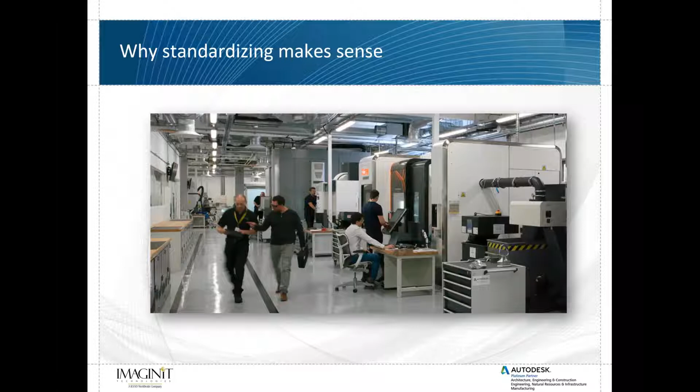So traditionally, manufacturing thrives when we can share data and when we can share workloads a lot easier, and we can automate things that should be automated, and really simplify management of complex processes. And everybody's looking for ways to standardize on all practical objectives within the manufacturing environment. When you do standardize, it does things like address the skills gap. You've got best practices that can be captured, and you're not relying so much on tribal knowledge.

Efficiency of process is basically replacing standalone stuff that's out there and prevalent all over the manufacturing world, and integrating systems to eliminate any redundancy. Yeah, lots of clients we talk to are using different processes for the exact same end game, right? So why not get this all set up to add toward the simplification of everything, streamlining your training, your support, your onboarding, your management, the whole works. That's what this is all about.

And of course, why Autodesk? Well, let's take a look. So for 35 years, Autodesk's mission has been to address what they refer to as the future of making things, right? They've done a lot of research and development into how manufacturing is going to be. It's not just the AutoCAD company anymore. Huge investments have been made in world-class, best-in-class technology that includes things like Moldflow for predictive analysis, Algor. Well, the product we're going to start talking about today that's integrated into Inventor and Fusion used to be called HSM. All these things are huge investments in Autodesk's initiative to become a go-to resource for end-to-end manufacturing technology.

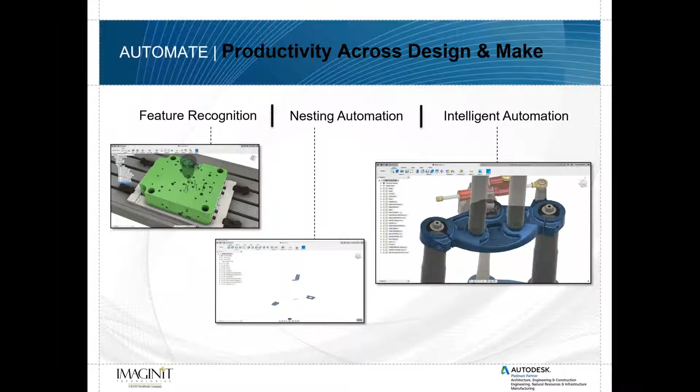All of this involves a technology that can be enhanced even further. So if you want to take this to the next step, you're going to see some stuff that Nathan is going to do for us this morning. It's pretty impressive. But if you want to take it a step further, working toward that standardization of process, and start talking about things like feature recognition, nesting automation, intelligent automation that takes workflows that are repetitive and captures that design.

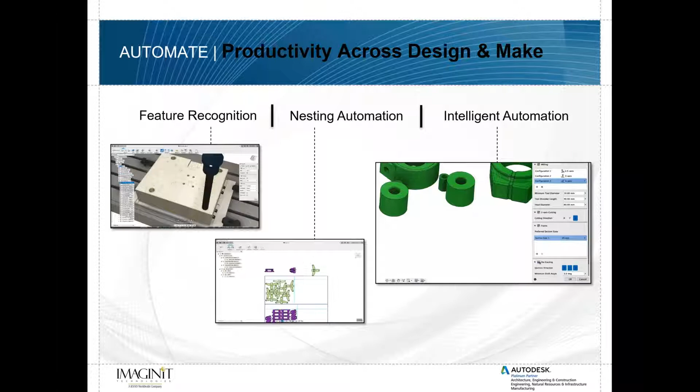For example, we can have our technology look at a hole, understand the diameter, the depth, and the material, and pick out the correct toolpath, workflow, process, whatever you needed to do to address that feature, and not have to have an expert on hand to make that decision up front, right? So it's all kind of captured, various ways of doing that. So we're happy and eager to talk to you about this process and workflow.

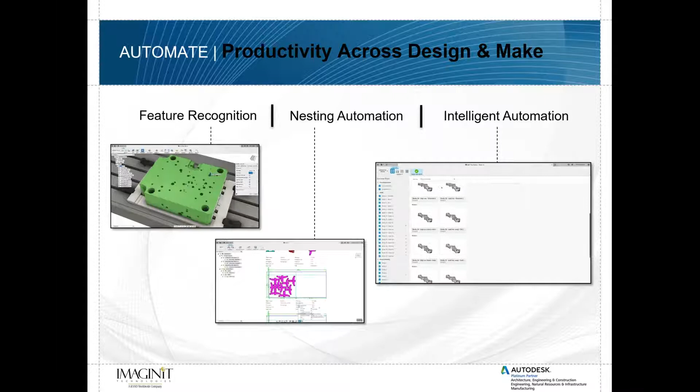I don't want to spend a whole lot of time on all of this, because I know you guys came here for the picks and clicks session of the demo that Nathan is going to present. And just as a quick intro, I know this is called milling. We're going to talk about milling inside of Inventor, but we're going to use Inventor and Fusion for a couple of things. We're going to do some multi-axis machining on the part that you see on the left, and then we're going to talk briefly about some turning operations on the part that you see on the right.

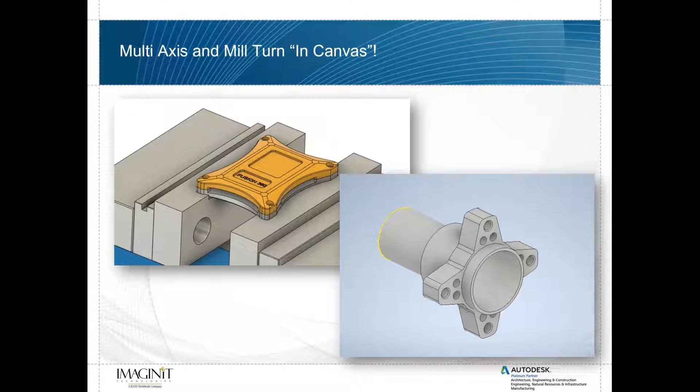So these are two fairly typical concepts, fairly typical geometry that you'll see used inside of the CAM environments, inside of our technology. So with all of that, I am ready to hand things over to Nathan to talk about using the CAM environment within Inventor and Fusion.

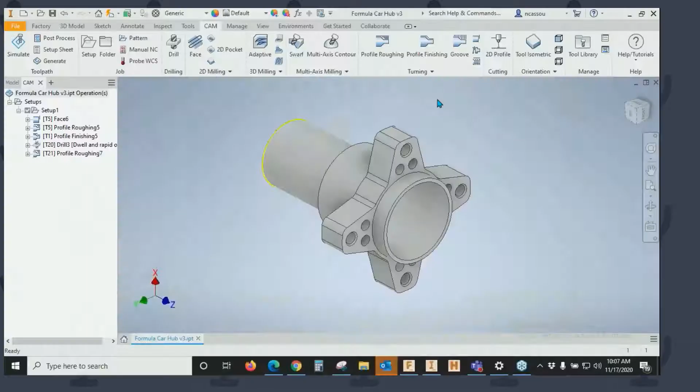Are you ready to share your screen, sir? I'm ready. All right, I think you can grab it. I don't think I have to. Let's see here. Maybe I need to change presenter here. Yeah, go ahead and change the presenter. There you go. Can you guys see me? I don't see you yet, Nathan. Have you hit show screen? There we go. How's that? Oh, there we go. Seeing you now. All right. Good deal. And kind of move this out of the way if I can.

All right. Well, thank you for joining me, everybody. I'm going to take you through the HSM CAM workspace as well as Fusion. I'm going to start out in Inventor HSM, and then we'll move on into Fusion. I'll show you some multi-axis CAM strategies in there in a little bit. And I really want to show you the similarities between the two, but also how they're different.

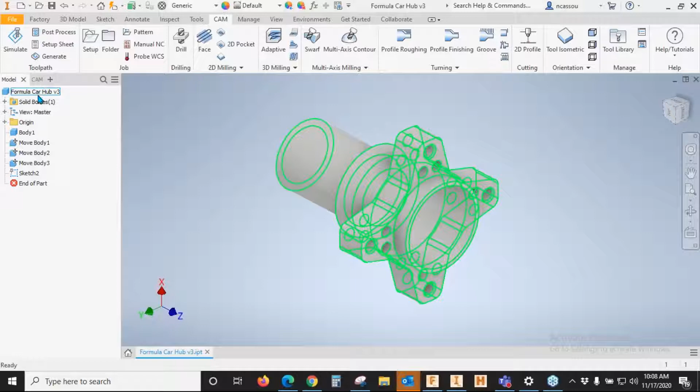So starting out in Inventor HSM, Inventor is more of your traditional integrated CAD/CAM software. So in the modeling section, we can see we've got our basic workflow and our feature tree down here, where we can see our parts being designed right here. And the big takeaway from Inventor HSM and Fusion is that it really works in conjunction with the CAM environment. So any changes we make to our design and our geometry will automatically update our toolpaths in our CAM.

So starting right here at the top, well, actually, I'm going to go right here into our 3D modeling. In Inventor, we have our full 3D modeling suite. So any design changes we want to make, any kind of sketches, annotation, inspection, it's all right here for us. And we can use all of these features in conjunction with our CAM environment. So that's important to know when we're doing our setups. So we're going to go ahead and jump into our CAM environment, and I'll give you a really quick run-through of what we have up top here.

In our toolpaths, we can choose to simulate, post-process our code for our machine, and generate setup sheets for operators in a really timely fashion. It's really important when we're making toolpaths that we simulate them so we can really see what's going on.

And then moving from left to right here, we can organize our toolpaths and our jobs with folders, and then create new setups as necessary, depending on what kind of machine we're working on. And then moving along, we have our full drilling, 2D milling, 3D milling, multi-axis, and turning suite for doing all kinds of different parts on different machines.

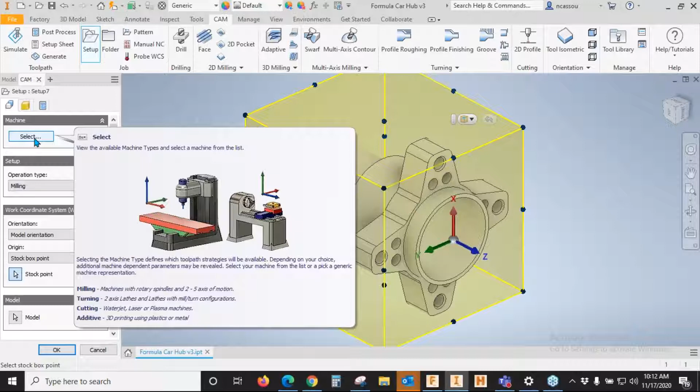So when you're first learning the program, you'll have these dialog boxes that pop up when you click on an option or an operation, and if you're unsure what that option is going to do, it gives you a brief explanation. I'm pretty happy with my machine. I'm going to let the program default.

Moving on down, I know this is a mill turn operation, so I'm going to go ahead and toggle that on. A lot of live tooling lathes will have dual spindles if you need to work on opposite ends of the part, which in this case is correct.

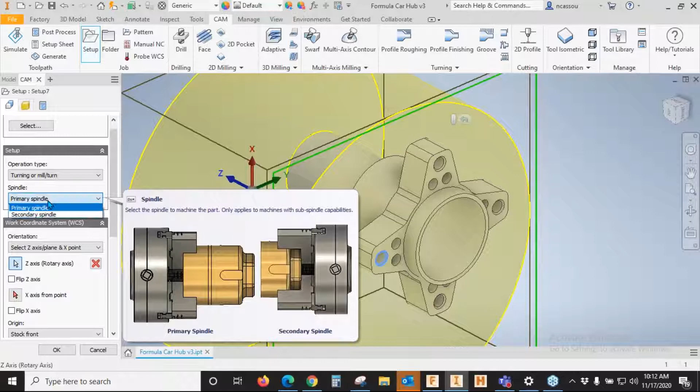So in this case, I'm going to hit the secondary spindle because I want to concentrate on this side of the part, as I've already done a setup for this side. We are going to do a little bit of turning over here, but this is a very simple turning setup on this side, so we'll focus on the milling and turning on this side so we can get a better description of what mill turning is.

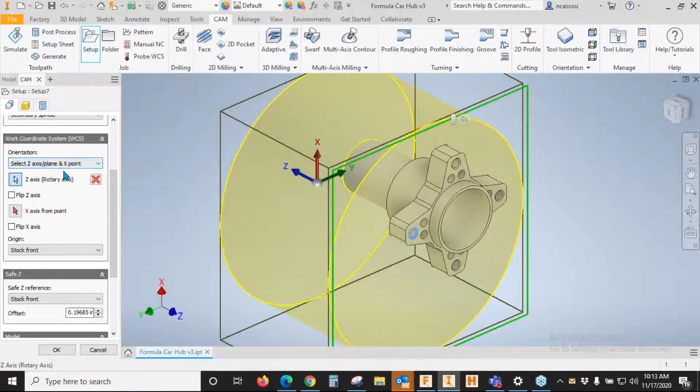And then working on down, we have our ability to set our work coordinate system point, also known as our Z0. And it gives us quite a few options for doing that. We can either choose it based on the model orientation, or we can just go ahead and select certain geometry of the part. And the program's smart enough to know that the Z axis is going to run straight through our part. So we'll go ahead and click on that.

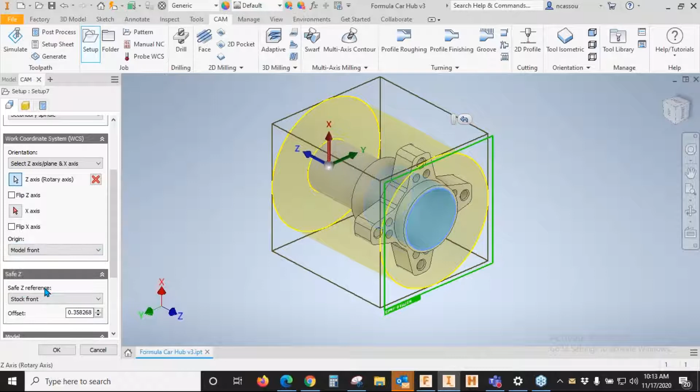I want to describe that as my model front, but I want to flip that Z axis so it knows that's the front of the part that I want to work on. And then moving on down, it's important to know that when we're doing a mill turn setup, we check that box there that says spun profile.

This ensures that anytime we're doing a turned feature, it's not going to try to turn any of these contours that we want to save for milling, because that's just asking for trouble. So it's going to ensure that when we ask it to do a turn profile, it's going to stick to that only. And then moving on into our stock, Fusion and HSM have a really handy way of being able to describe your stock.

With this drop-down menu, we can either choose from a solid, or we can choose if we want to go ahead and model our stock and then move it into the CAM environment. We can do that.

I usually choose with these default options to pick a relative size cylinder. I always like to default to a relative size because that gives you the option of adding a little more stock. In this case, I want to add about 40 thousandths to the front and the back, so we have a little extra stock to make a nice clean surface.

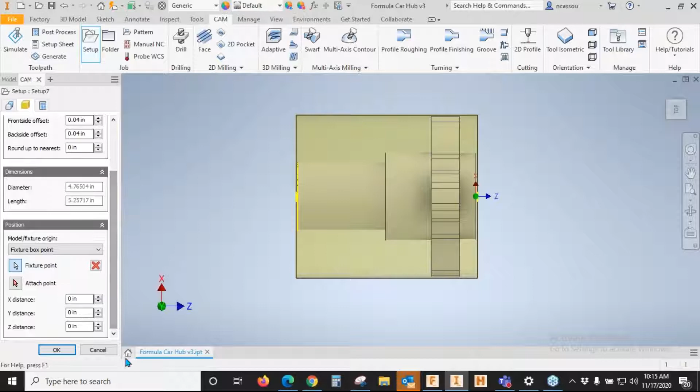I'm happy with my post processor, my post name. We'll just leave that as default. I'm going to go ahead and click OK.

We've already got our first setup. So now once you set up the stock and the work coordinate system, we can go ahead and start choosing operations that we'd like to do. The first op that's pretty common in all machining is a facing operation.

That's just when we get in raw material, the outside material is dirty, it's gouged, it's uneven. So we want to face that off to a nice clean surface where we can start measuring features from. In this case, I'm going to choose my facing feature.

Every operation kind of goes from left to right, and it allows you to first pick your tool, your geometry, your boundaries, and your passes.

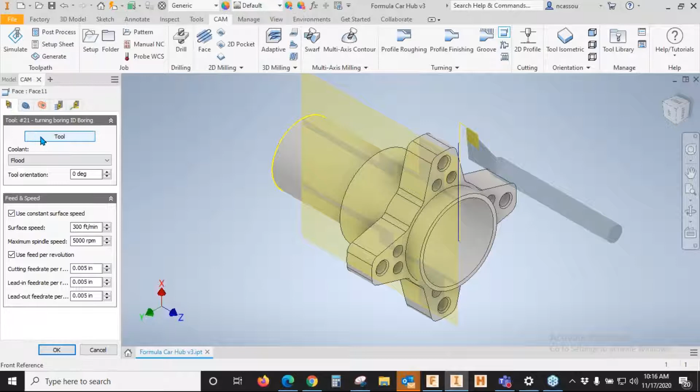Starting with our tool, once I click on tool, the tool manager will pop up, and both in Fusion and HSM it's very flexible on how you can add tools, make tools, import, export. So if you can't find a tool within the default part of HSM, you can choose to build your own tool and even create your own libraries as you go along.

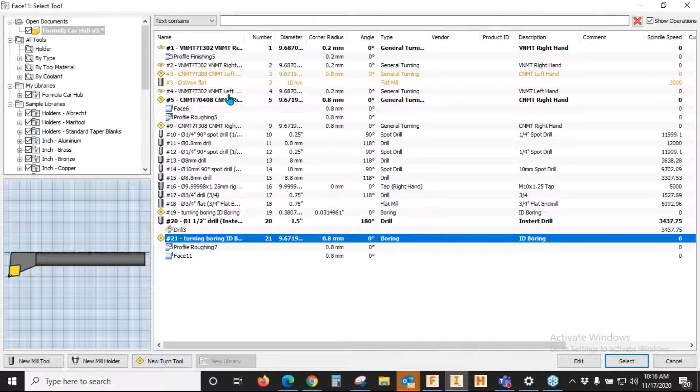In this case, I've already created my own tool library for this part. So I'm going to go ahead and click on my facing tool, this 0.8 millimeter turning tool. I'm going to select that.

Moving right along to our boundaries, this really describes how we can set up where we want this tool to start and stop. Automatically we know that we want to face off the front of that part. The program is smart enough to know that it's a facing op. We want to bring all that material down just to that Z0. But if we want to take off more, we can always add an offset there as well.

Moving right along to our clearances, this is a really handy way to control the behavior of how the tool enters and exits, actually, as it's transitioning around the part when you're cutting features. This is a great way to avoid crashing. Again, this is easily interactive, so we can grab this and grab our part and move it in and out and kind of see visually where we want those clearances to be, as opposed to just entering numbers in all the time.

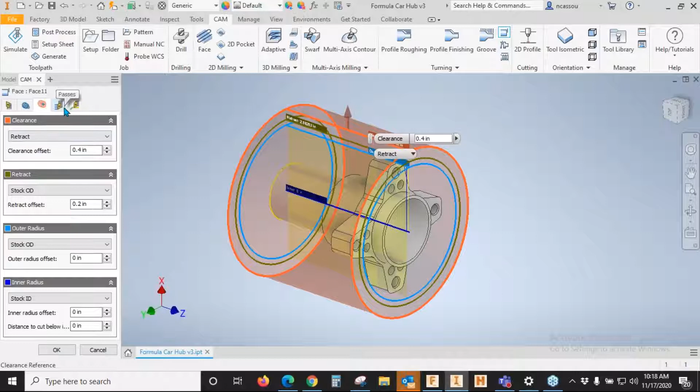I'm going to leave those as stock value, because another great thing about Fusion and HSM is a lot of the default values, when you're first starting to create a tool path, are pretty close to spot on, and you can use those values and then go back and tweak it as you wish.

So for passes, you do have the option to have multiple passes on each feature. In this case, I know I've got that 40 thousandths that I want to take off in the front. I'm going to be generous, I'm going to say 20 thousandths, and it'll automatically calculate the number of step overs based on the width of the step over that I want.

And then in linking passes, you can control the in and out of the tool on each feature. So I'm pretty happy with that. And we've already got our facing feature, so we faced off that front face of the stock.

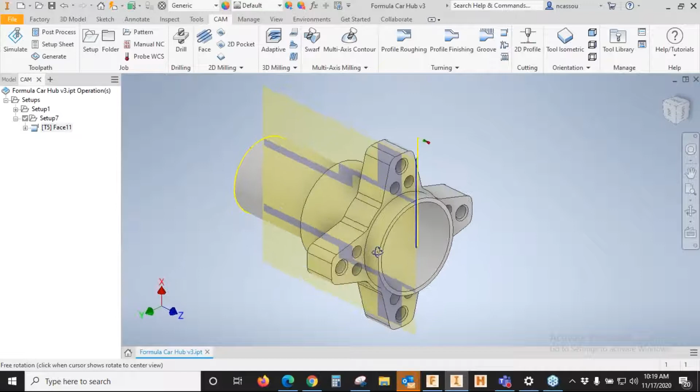Now we can go ahead and start working on that little turned part there, that little turned boss. So we're going to go ahead and click a roughing profile strategy. Again, going to go up here. I'm going to use that same tool that we used for facing.

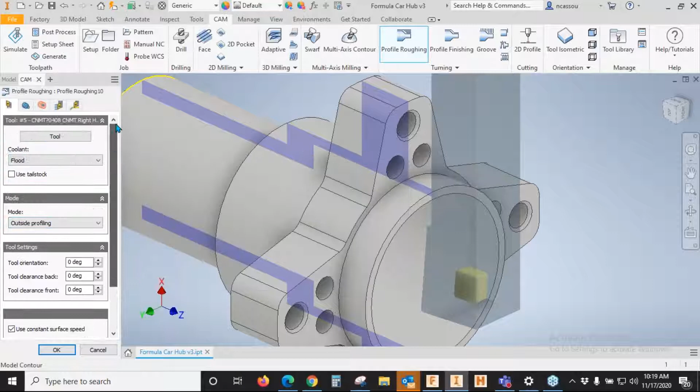And what I want to do now is tell it that it's an outside profile, not an inside. So it gives us that option. We're going to use that same profile whether we're doing an inside strategy or outside, but it gives us that option. Moving right along to our geometry.

So when we're choosing our boundaries for both milling and turning, it automatically knows what you want to cut, but you want to kind of give it a boundary. So I know I don't want to cut all the way back here. I want to set my front boundary at the front of my part, but I want to set my back boundary to exactly where I want to stop that cut.

So in this case, I can set my back boundary to that surface. And then when I look at my part on the side, you can see that we're just going to turn that where that highlighted space is. We're just going to turn that boss so we can make room, and I can get in here with that end mill and start milling that contour.

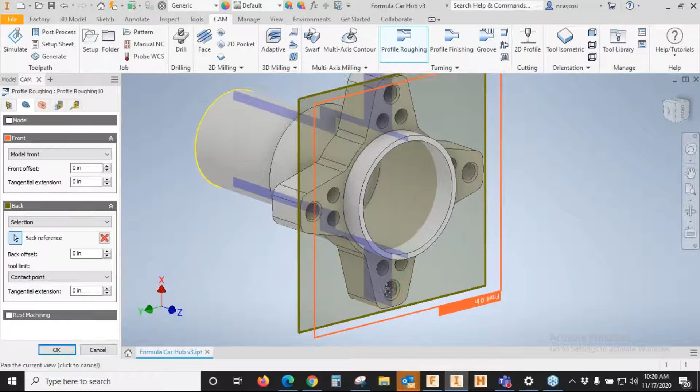So moving right along to our clearances. Again, the stock clearances are usually pretty good. And again, it's all based on the geometry of the part, the tool you pick, and your feeds and speeds. So I'm pretty happy with those.

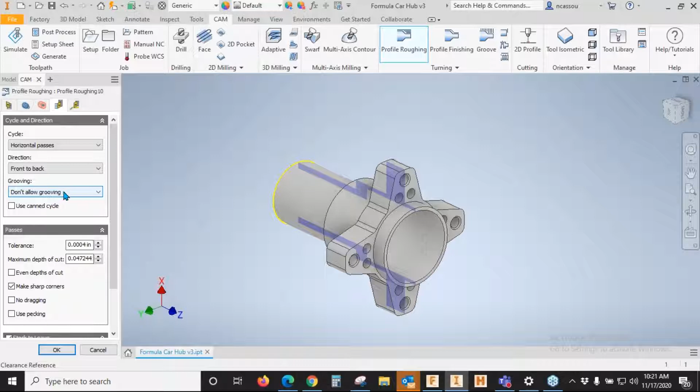Going right along into our passes, I know I want to go from front to back. This being the front, again, being the front of the part. So I know I want to go from front to back. I usually like to toggle off this axial, or excuse me, this grooving here, this axial grooving and radial grooving.

This just tells the program not to do any kind of weird features that it might encounter. Again, this is a pretty simple little boss. We're just going to turn on the outside, but I'd like to toggle that off just so it's not going to try to do any of this other geometry.

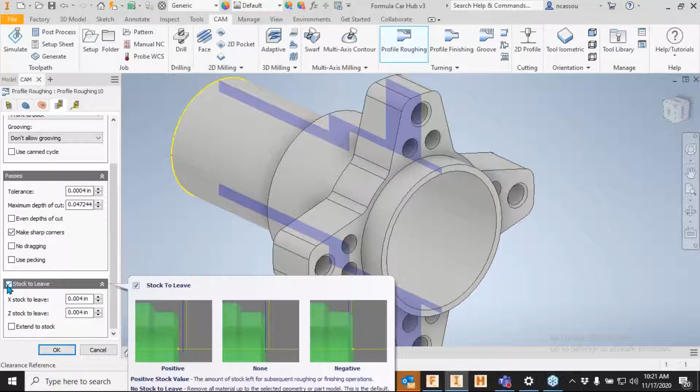And I want to make sure that we can either come down here and we can choose to leave some stock if we want to come back through the finishing tool. I'm going to go ahead and check that off just so we can get a nice visual of what this is going to do. And I'm pretty happy with the lead in and lead out.

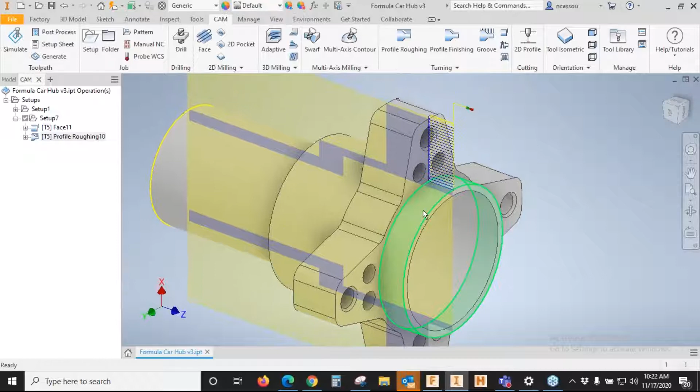And there, right away, we already have our first little turning strategy. So let's go ahead and simulate that and see what it looks like.

So when we simulate, we can either choose to simulate the whole part, or we can choose to simulate different features of the part. And what's really handy about Fusion and HSM is instead of just playing the whole simulation, I can just click through to save time, and I can also see what's going on with the part. So right here, it looks like I have a little bit of a crash, but it's really handy when you're analyzing just the lead in and lead out and your clearances.

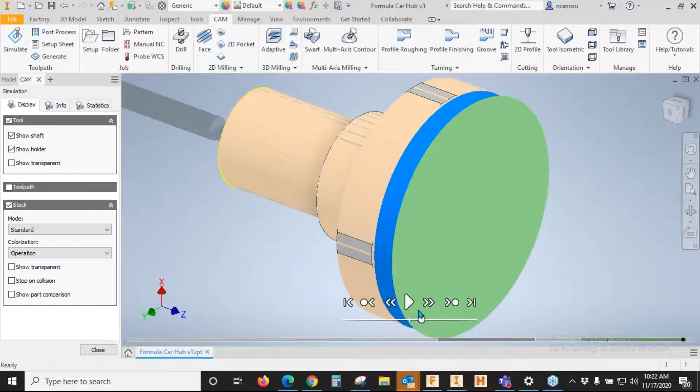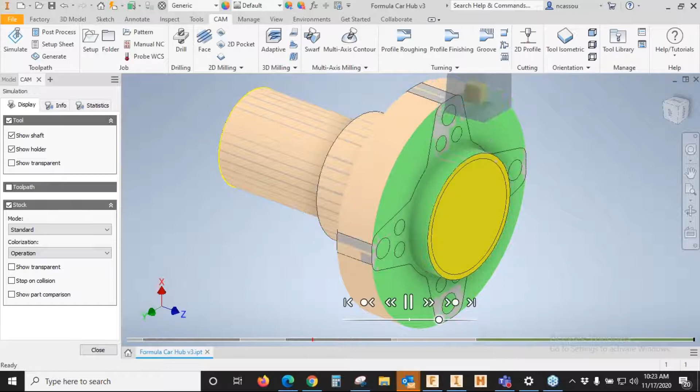So I'm going to go ahead and fast forward through here, slow this down, and then we're going to go ahead and face off that part, that other end. And then automatically it should start coming in here, and then it's going to turn that down all the way down to that bottom stock, excuse me, that finished profile. And we're looking good.

So now once we've turned that, we can go ahead and start working on this outer contour for our milling strategy. Now the cool thing about HSM and Fusion is, again, I can use both these turning profiles, these turning features, and these milling features in the same environment.

And when we want to cut out a rough profile or any kind of a contour or any geometry, both Fusion and HSM have this adaptive clearing strategy, which is a really efficient way to engage the tool to its full potential without really adding a lot of excess tool wear. So in this case, the adaptive clearing strategy engages the tool at about 40% load.

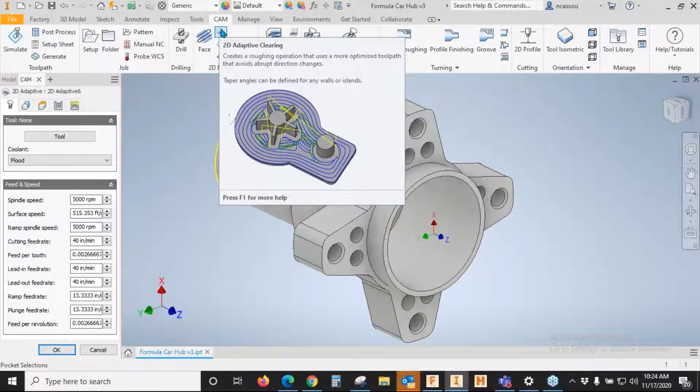And again, that really ensures that the tool is getting used to its full potential, and that it's also not going to burn out. It's going to have a lot of life left in it.

So same thing with turning. We get to pick our tool, and in this case I want to just grab my 3/4 inch flat end mill. One thing to also know, in our tool library, when we click on a tool we can choose to edit that tool. We can edit the holder, the flute length, and any kind of data that we want to throw at the tool, any kind of changes we want to make to it. We do have that option. So I'm going to go ahead and select that.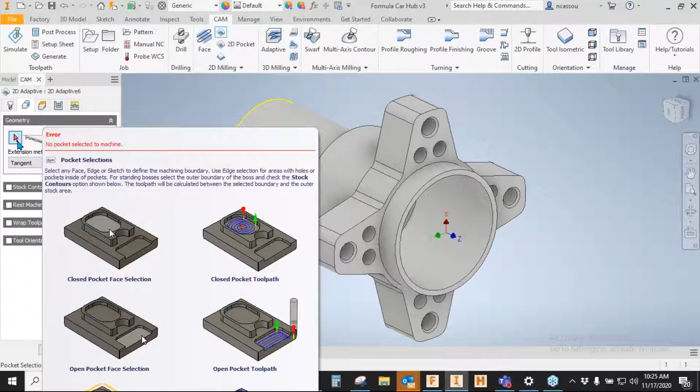And then moving right along, it asks us to choose our geometry. This could either be a pocket or a contour. That's the really neat thing about adaptive clearing, is it's very flexible in what kind of geometry you pick. In this case, I just want to pick that bottom surface, and automatically you can see that this is the direction it's going to machine around.

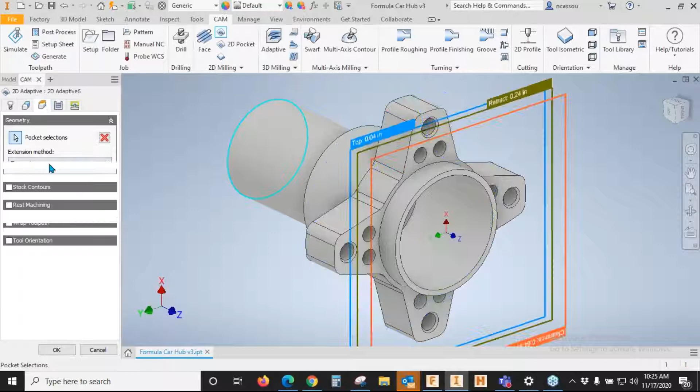I'm pretty happy with the rest of these features. I don't really need to go into all of these. This is a pretty simple strategy. And then once again, just like turning, we can describe our boundaries.

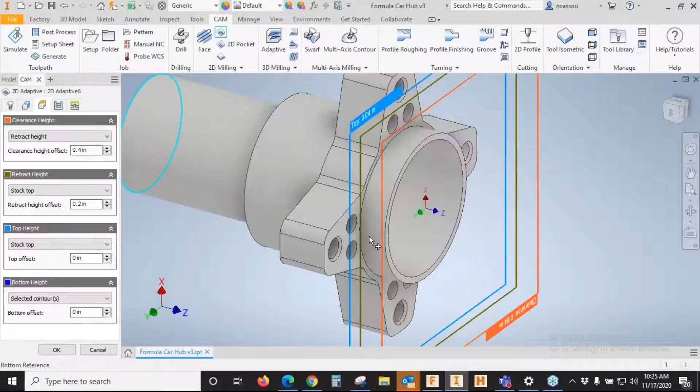So when we're either turning or milling, we've already given it a pocket or a piece of geometry or a contour to follow. But now we want to tell it where to start and to stop. So this clearance height, I'm pretty happy with. Again, that's kind of where that tool is going to start spinning and then come in here and start turning that profile. But more importantly is our top height and our bottom height.

So I know I want this contour to start at, we'll just say, my model top. That way I can bring that in, and it knows that this is the front of my part. And then for my bottom reference, I know that that's where I want the tool to end. I don't want to cut any material over here. I have already turned all of this down, but I do want to make sure that tool knows not to go past that boundary.

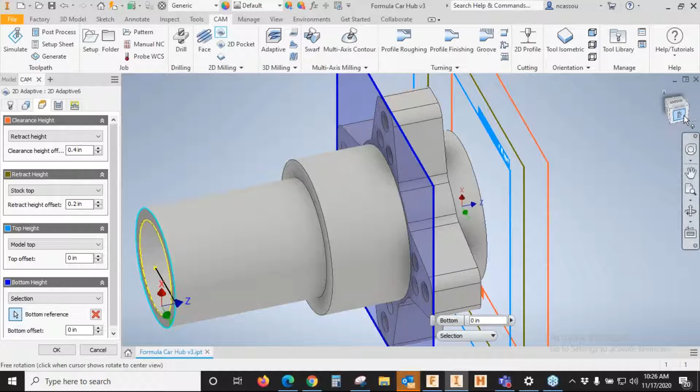However, in this case, since I want to make sure that I get a nice clean cut, I'm going to make sure I can offset that back about, let's make that -0.25, about -250 thousandths. That way, when that tool is going around that contour, it'll kind of clean up that burr, and it'll ensure that there'll be no burrs left.

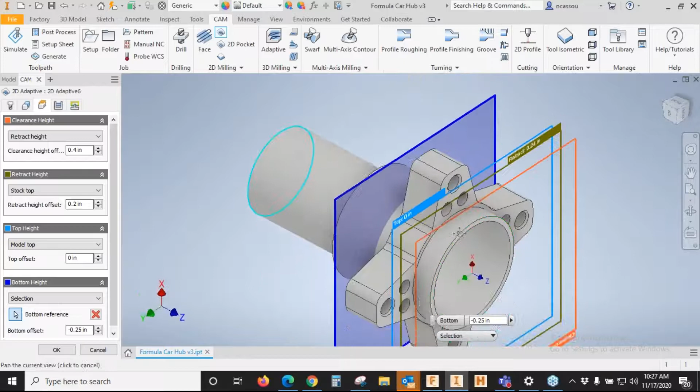I'm pretty happy with my passes, and since I've measured these radiuses in here and they're a little smaller than the radius of the tool, I'm using a bigger tool to come out here and rough with that adaptive clearing strategy, and then I'll come back through with a contour strategy, and I can clean these radiuses up to get my true geometry.

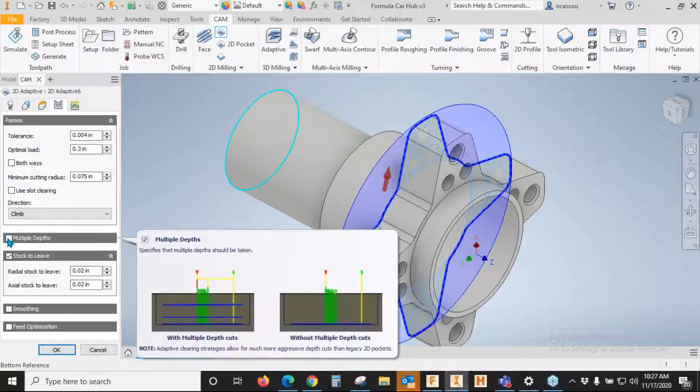So in this case, I do want to have some stock to leave, but if I wanted to toggle this off and just go right down to the geometry, I also have that option. I'm not going to put on multiple depths. I think the adaptive clearing default values will work just fine. So I do want to use about 20 thousandths around. I'm happy with my linking passes. So we'll go ahead and see what that gives us.

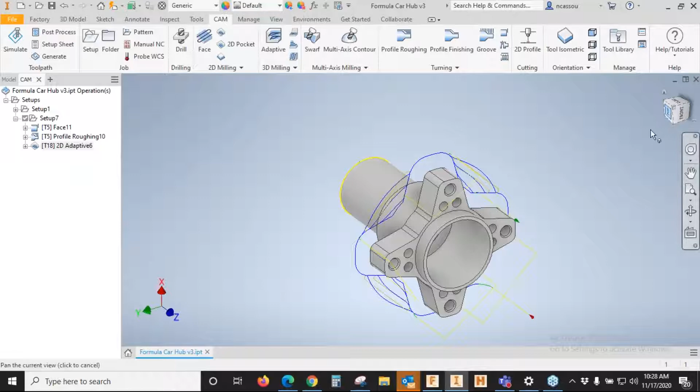So right away, you can see that it's given us a nice adaptive clearing profile. It's gone to that boundary, which is what we told it to do. So let's go ahead and simulate that and see what we have. Again, I can jump ahead so we can save some time. Jump back here.

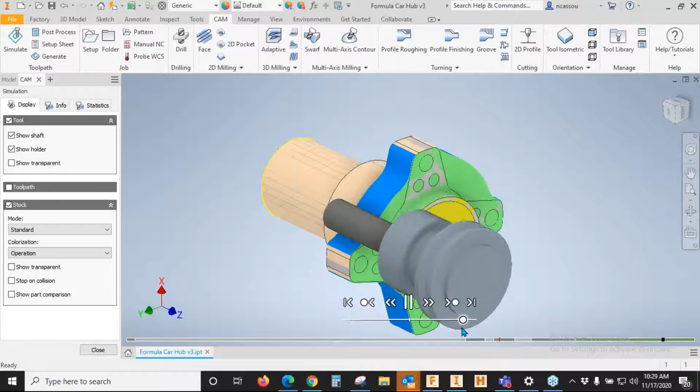So after we turn down that little boss in the front, we switch tools. We can speed this up. And that adaptive clearing comes right in there, and it'll mill that out for us. Again, that's just using a very efficient method of clearing out material. We're going to come back through with a finishing strategy to get those radiuses. So I'll close my simulation.

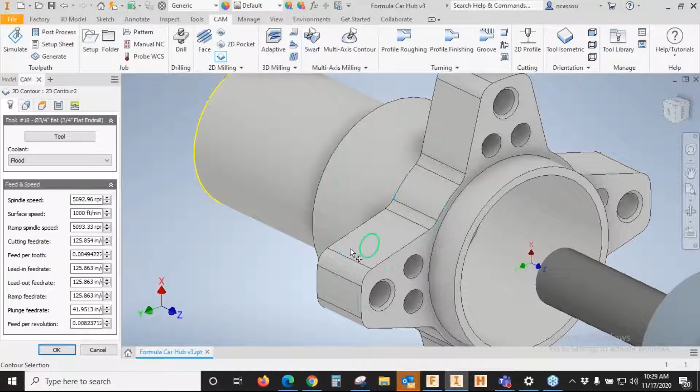And what I can do now is I can go ahead and do another finishing strategy. Let's go for a 2D contour. What this is going to do, instead of just moving out material, is it's just going to follow that contour we gave it, similar to adaptive clearing, but we are going to remove material by just following that path, so we can remove the same material. So I'm going to go ahead and select that contour.

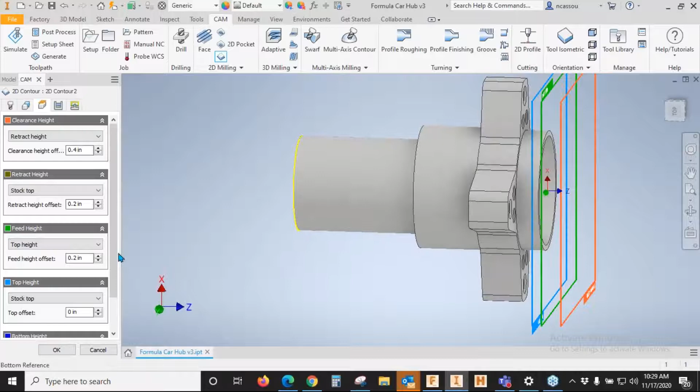I'm going to go ahead and give it the same bottom reference, probably -25. Another thing that is very handy when we're picking toolpaths, and I'll show you here in a minute, go ahead and select that, is that I can also come in here and I can make a derived operation.

So if I don't want to pick a whole new operation, a whole new feature or toolpath, and I want to use the same tool, same feeds and speeds, I can come in here to 2D milling and choose whatever I want. It's going to pick the same tool, and I don't have to spend time entering in all those extra values. In this case, I'm going to stick with that contour. One thing I did forget to do is, okay, so it defaulted.

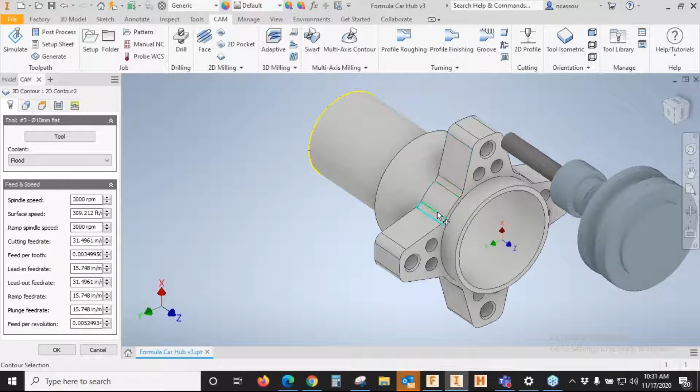We can leave stock if we so desire, but in this case, I want to come in here with that smaller tool and finish that off. And I want to make sure I have the correct tool. I don't want to use that flat end mill. We'll use something a little smaller than that. Let's see, that 10 millimeter flat end mill. So it's a little smaller radius. You're going to be able to hit that geometry and finish that off.

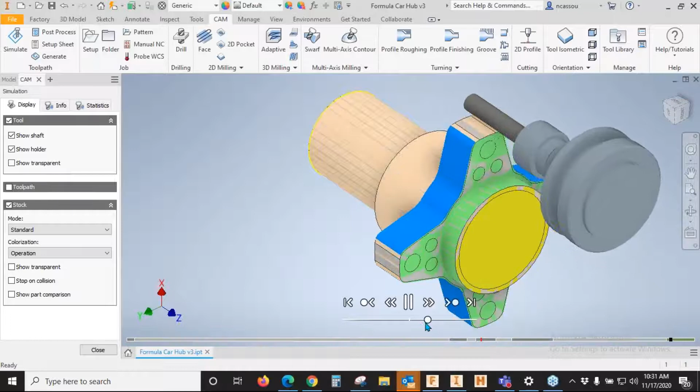So we can go ahead and simulate all this. Go right to the end. And there we go. So we've used adaptive clearing to rough out that basic profile, and then with that contour we finished that off with a smaller tool. So that's kind of how milling and turning works in HSM. I'm going to jump on over to Fusion and show you how we can use the same strategies and different multi-axis strategies.

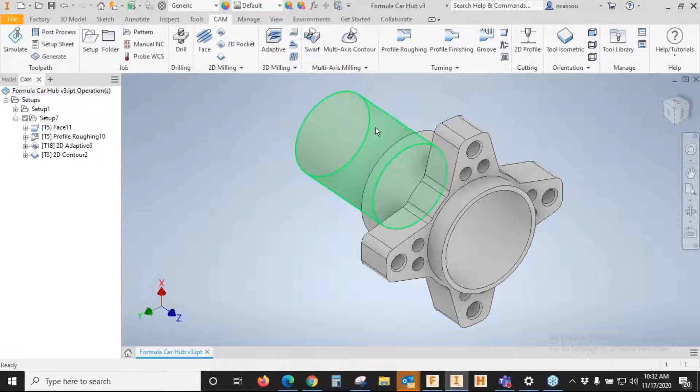Hey, Nathan. I just wanted to clarify, a couple of questions came in. This operation you just finished up, you kept using the term HSM. HSM, of course, is the technology that Autodesk has created for the Inventor CAM environment. So what we've seen now is Inventor CAM. It's the same CAM environment, just the difference in CAD tools. Correct, that was my mistake. Yes, we are in the Inventor CAM environment. Both Fusion and Inventor use HSM.

So going on into Fusion here, it's a little bit different interface. One thing to know about Fusion is that we already have all of our CAM suite up here, just like in Inventor. But the main difference is that we can switch between environments: the design environment, simulation, manufacture, and we're pretty much always in the same environment. For instance, if I go to the design environment, none of this model browser data has changed, but down here we have our full work history.

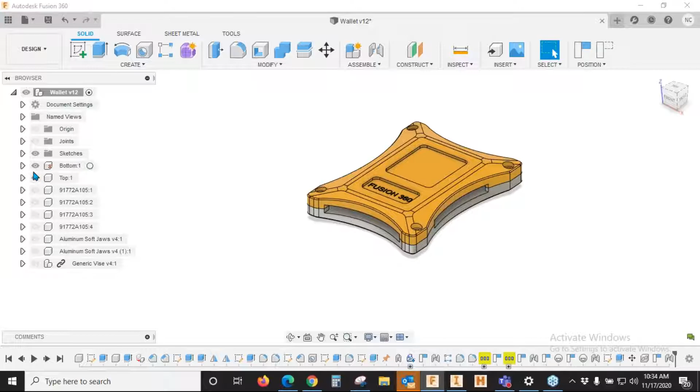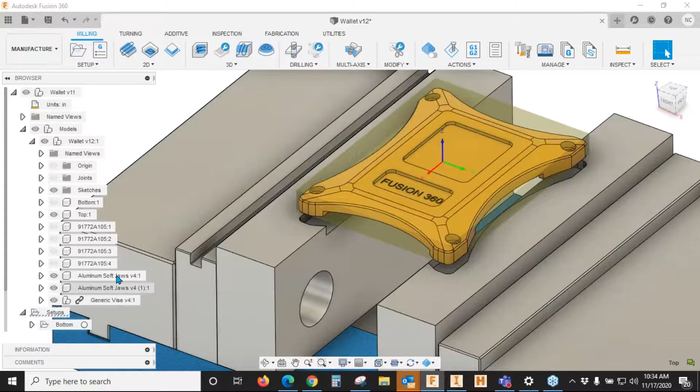And the really neat thing about Fusion is I can turn a lot of parts on and off as opposed to suppressing a feature. So here in the design environment, I can turn off my jaws, I can turn off parts as well, and now I can focus on this part alone and do any kind of design work to it, CAM, and then when I jump right back into manufacturing, I can come right back into the models and click my jaws and my vices and things like that. So it's very intuitive.

It's a lot easier to use, but again, it uses the same HSM interface. So let's go ahead and look at some multi-axis strategies for Fusion. We'll work on this top part here.

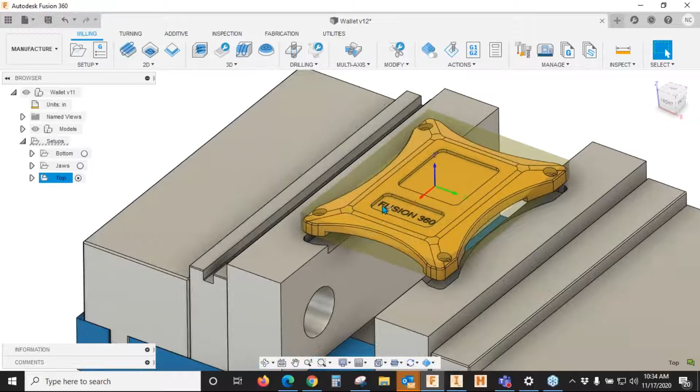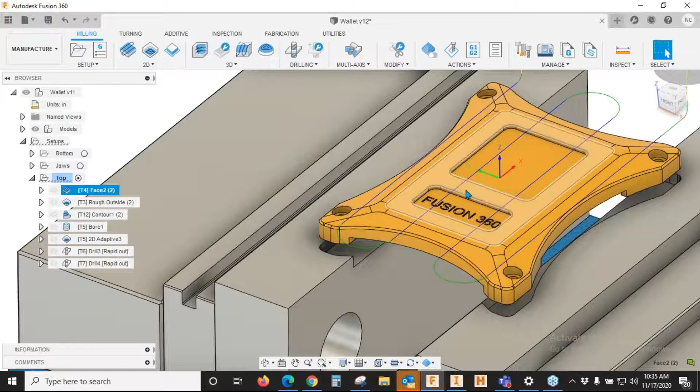I've gone ahead and done the facing op already on this part, but what we kind of want to look at now is a few different strategies to get this more flowing geometry that we have. We know we've got some sloped features here. We've got some curves, and this is going to be better suited for a multi-axis machine.

So I've gone ahead and gone with a face operation here, and when I click on this, you'll notice that it's still the same environment. It's still HSM. So we can come in here into our library. We can select our tools. It's a little bit different than it is in Inventor.

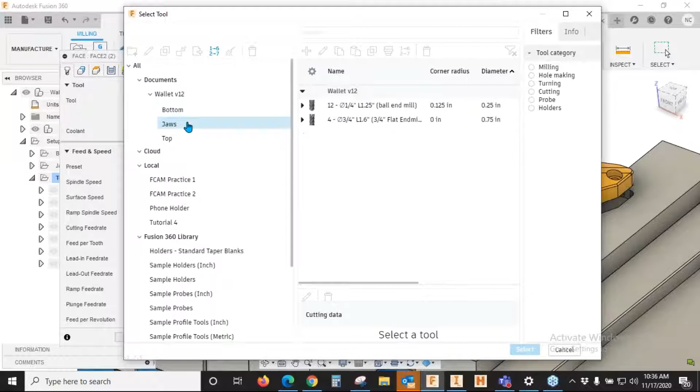One thing I really like about Fusion is that if you haven't built your tool library yet, but you want to start adding toolpaths, it will start to populate and build you a tool library with the part that you're making. So for this particular part, I came down here and I selected a lot of these sample tools that were already given to me in the Fusion library. And then as I was building it, it actually started creating a library as I was making toolpaths.

So when I click on this top part here that I'm working on in this assembly, here's all the tools that I've used and I've chosen. So I can actually go in and I can save these as individual libraries for this part.

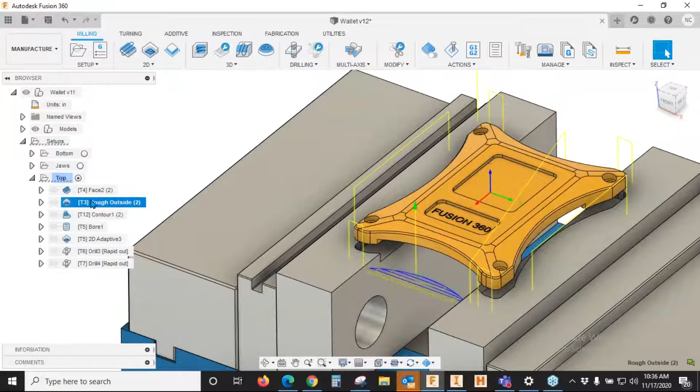So one strategy I want to look at right now is I've already done a face. So I have my stock sitting in this vise. And let's go ahead and look at how we would do an adaptive clearing on this outer perimeter of this part. So just like we did in that turn mill part, we can go ahead and select our tool. I'm going to go ahead and use this 1/2" end mill.

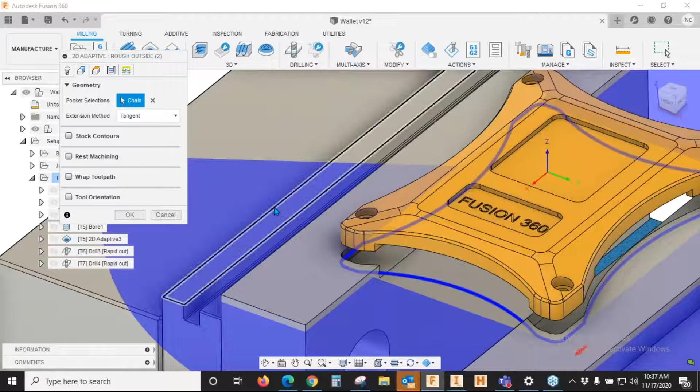And again, we can start picking our contours. And once we pick that main contour that we want to cut out, it already knows how our tool is going to behave when it's entering and exiting the part. So in this case, this looks pretty good, and I'm going to go ahead and move along into my passes.

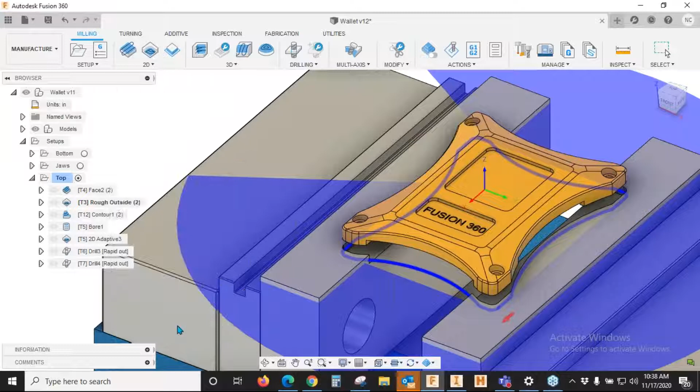When we're doing an adaptive clearing, we can do it on a 3D strategy or a 2D strategy, but it's good to know that you can get a lot done with a 2D adaptive strategy, and even if you don't have a 5-axis machine, you can get a lot done with just these simple tools in the 2D. So we're going to go ahead and use that rough outside strategy for our adaptive clearing. And again, it uses a 40% load on that tool, just like in Inventor.

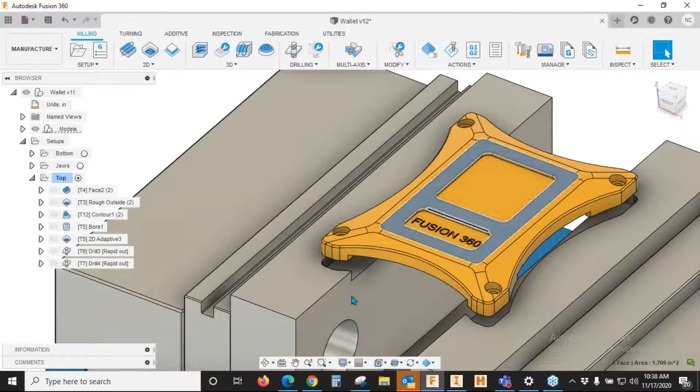And the next thing I want to touch on is how we're going to get this top surface here. So we know we've already faced that top part off, so that's already flat. But now we want to focus on this outside geometry here, and we have a couple different strategies we can use. When we drop down our 3D features, we can choose parallel. Scallop is another great feature for this.

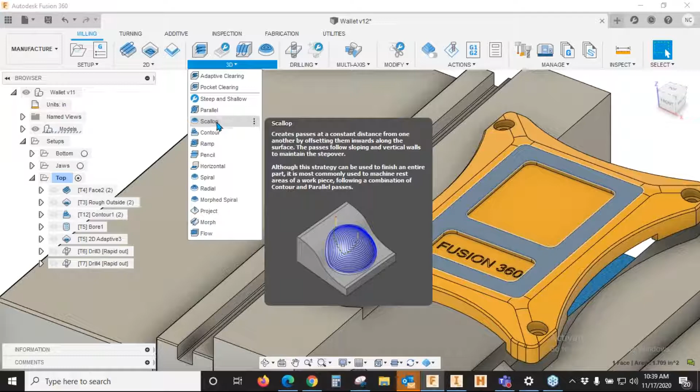And what it does is it's going to select a strategy that's going to kind of mold to the part itself, and we can go in and tweak how we want the pass to go around the part so we can get a better finish. In this case, I want to go ahead and use a contour strategy. The reason for this is because I know that I've already flattened off that top part right there, but I want it to go around this part. So really the only 3D features that I have are just on the outside of that bounding box.

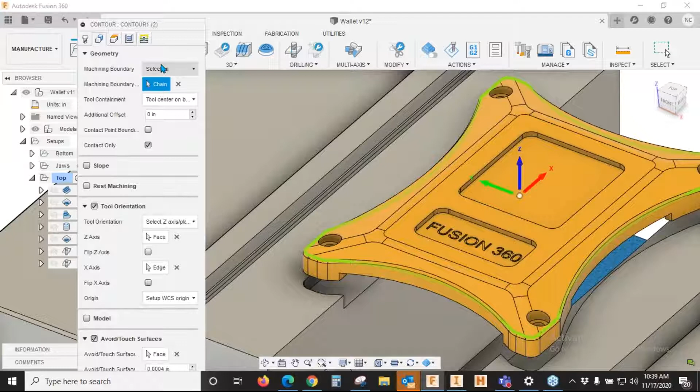So we come in here to our contour. I've already picked my tool. In this case, it's going to be a ball end mill, so it'll give me a full range of motion as I'm going around the part. And when we're selecting geometry for a 3D contour, we're going to describe it as a boundary. So we know we want to do all the geometry that's within this boundary, but we also want to limit it because we don't want to hit that top surface.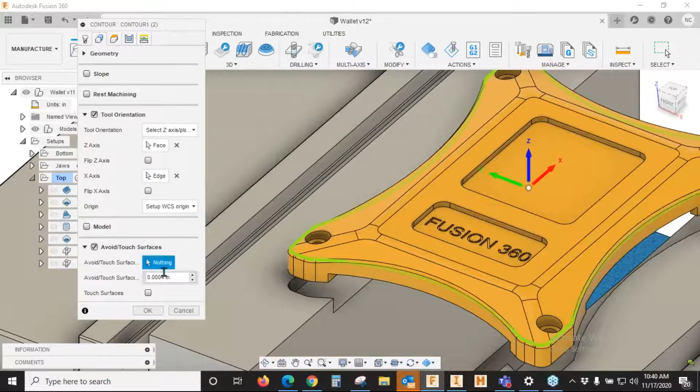So when we choose the geometry for a contour, we can come down here and we can check this button for avoid and touch surfaces. So in this case, I went ahead and chose that surface right here. And that way, when we go to mill this out, it will only constrict that toolpath to that boundary, and it'll calculate that toolpath for us.

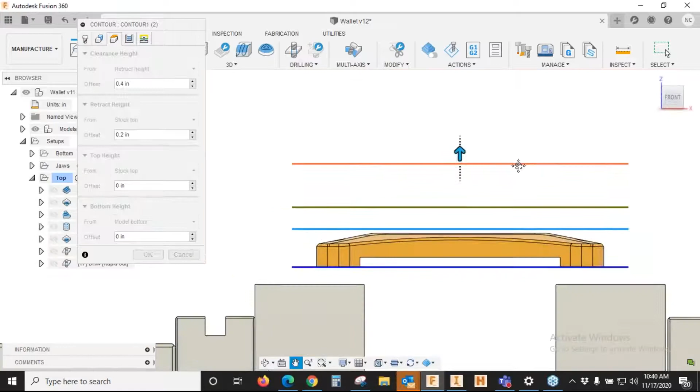So I'm happy with my heights, and then we're moving right along into passes. I'm going to go ahead and leave those at stock value, and we'll kind of see what we come up with. I'll kind of show you how this is going to mill that out. Go ahead and simulate that.

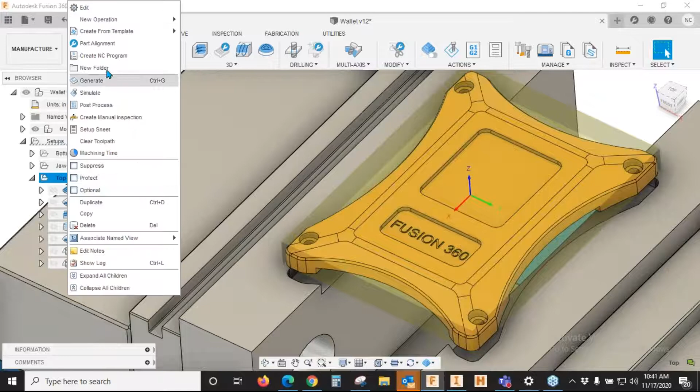So we run through our facing op. We'll do some adaptive clearing on the outside to get our basic shape. And you can see right away that we've told it not to hit that top surface. So now it's automatically calculated a 3D contour without hitting that surface.

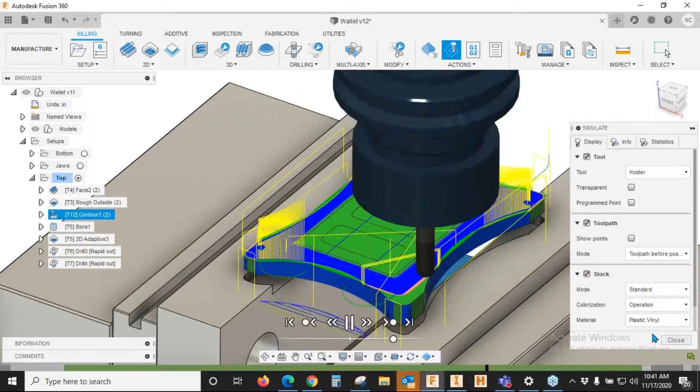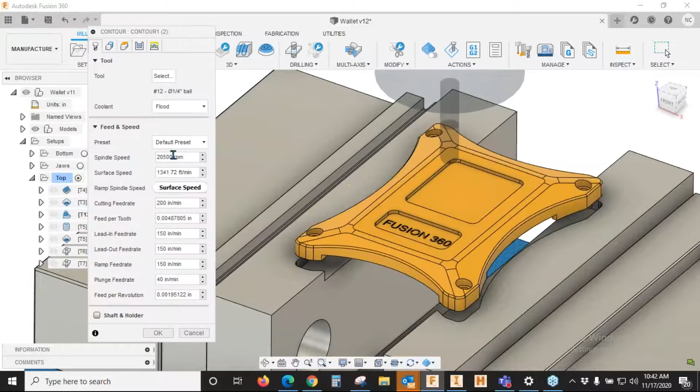And there's a couple of different strategies we could use for this. We could use parallel right up here, or we could use scallop as well. The reason I chose this 3D contour is because, again, it's a pretty symmetrical part, and we've already faced that top feature off, so that's the best feature for this. Using the best tool operation for this particular feature.

Another thing I want to emphasize is that when we're dealing with passes, we can look at this maximum step down. This is going to really determine what kind of finish we want to get. So there are quite a bit of different selections that we can have, but it's important to know that when we're making toolpaths in HSM, the default values will give you a pretty good result, and then you can go back and tweak how you would like this.

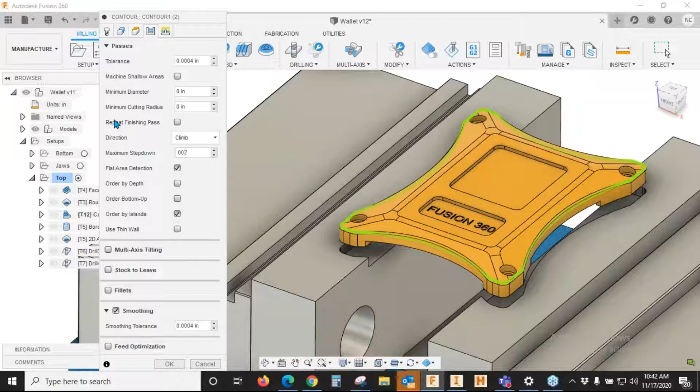So say we don't want this part to run so long. Let's try to up that to 0.002 step down. And then that'll regenerate. And we can kind of zoom in here, and we can notice that these step downs are a little wider. So that's one way that you can use a 3D strategy when working with Fusion.

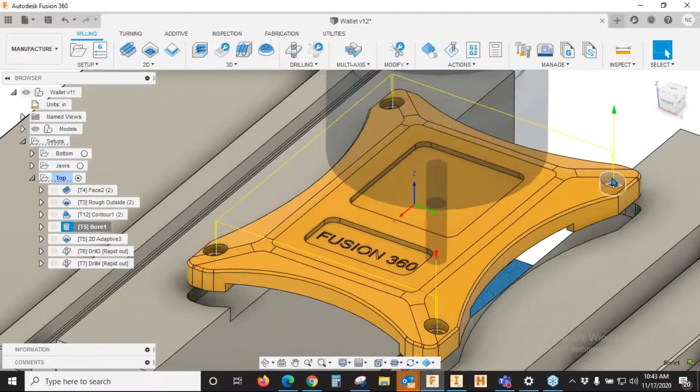We can also go into drilling operations, and I want to show you how we can use boring and drilling. So in this particular part, I chose a boring operation just because these were not just a standard size. So I'm going to go ahead and leave that alone, but I want to show you how we can come in here to a drilling operation.

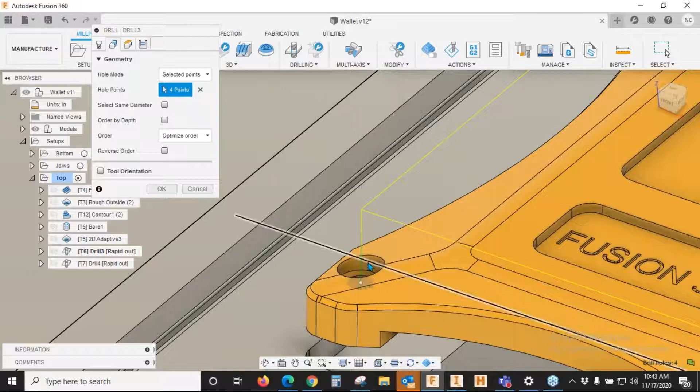And when we're choosing our points to drill in, we have this option to select same diameter. So when we're picking a drilling operation or a hole, anything like that, we can either choose to pick these individually, or we can hit same diameter, and it will automatically recognize that yes, we have the same hole and it will create that toolpath automatically, which is exactly what I've done here.

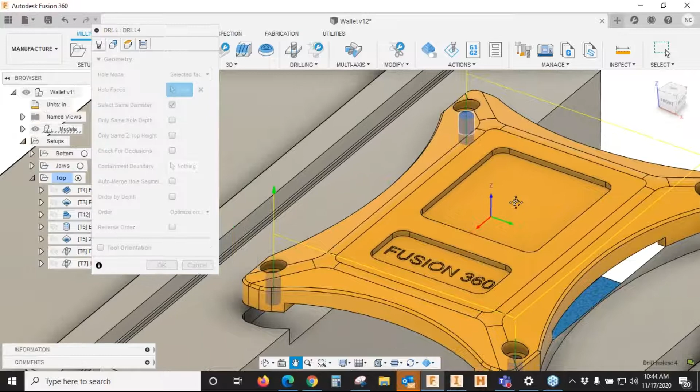So I've gone ahead and I've bored those holes and counter drilled them, countersunk, and then I've come in here and I've drilled those out. But all I've had to do is select these faces and then hit same diameter. It's automatically generated those holes for me.

So when we're working in this Fusion CAM environment, it's really handy to know that we're working in an environment that's kind of all inclusive. So let's say I want to do this top part, but I want to switch to this bottom part. All I have to do really is come up here to my models, click on that bottom part, turn off my top part, and I'm ready to start doing setup on that. So it's really handy when you want to save time and you don't want to be moving data around so much.

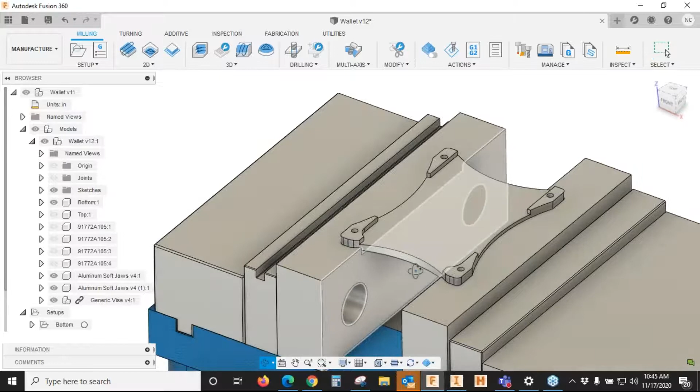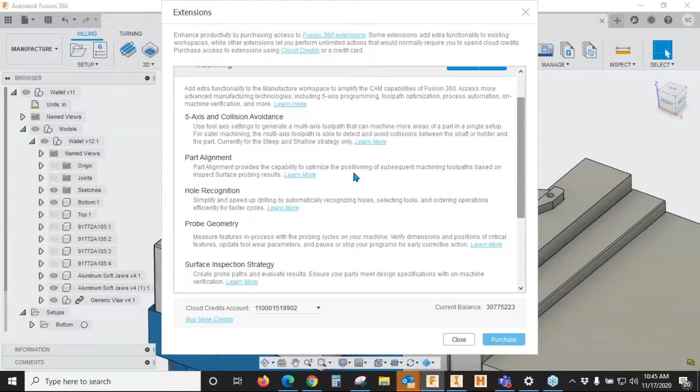One last thing I want to touch on is ways that you can kind of hot rod your Fusion environment. You don't have to use the same features all the time. Fusion does offer several different extensions that you can add on to your CAM: 5-axis collision avoidance, hole recognition, rotary strategy when you're doing kind of complex shapes, and just a lot of different features for really getting the most out of your CAM experience.